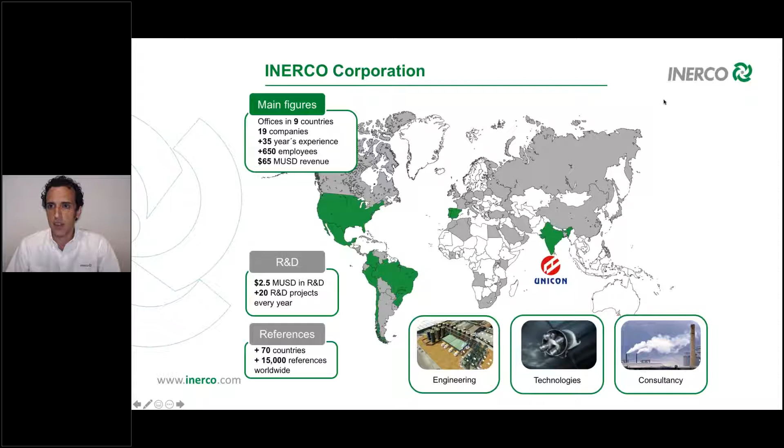First we are going to review the environmental framework in India, just a few words. Secondly, we'll go through the combustion and low NOx technologies. And then I will show you a very interesting part, the case studies, with some examples of the way to go.

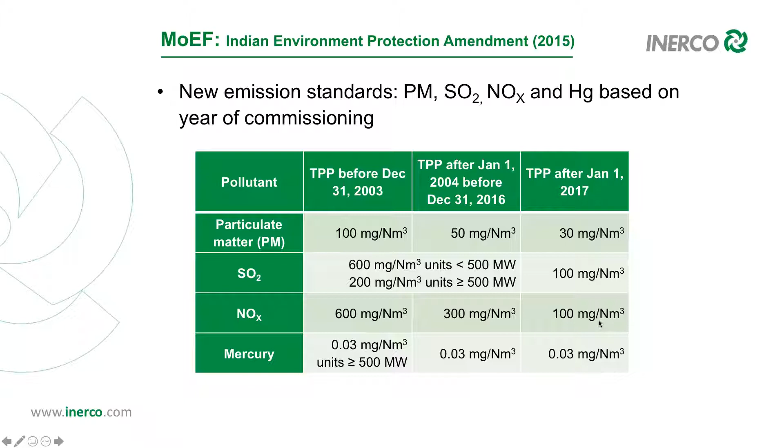So I'm going to start with the environmental framework in India. In 2015, the Ministry of Environment and Forests released new emissions standards for thermal power plants (TPP), covering particulate matter, SO2, NOx, and mercury, as you see in the table. The limit was based on the year of commissioning and the boiler size, as you see here in the differentiation. For NOx, initially the limits were 600 milligrams per normal cubic meter for units before 2004, 300 milligrams for units before 2017, and 100 milligrams for new units after 2017.

During the last year, there has been a lot of discussion about the implementation of these standards, especially the 300 milligrams limit. In May last year, it was approved to raise the limit from 300 to 450 milligrams. Since the beginning of the year, there has been a lot of push, especially from utilities, to increase the 100 limit to 450 milligrams too, arguing that the technologies for 100 milligrams are not suitable for Indian coal. We'll see what's the final decision, but in the short term, the standards are going to be somehow relaxed.

Comparing the implementation of environmental standards with other countries or regions like the US or Europe, in those regions these have been applied in different phases. Normally it takes around 10 years to implement phase 1 and phase 2, as we've seen in the US and Europe. My guess is that in the long run, all these limits will be reviewed again, and there will be more strict standards implemented. But like I said, it's going to take 10 to 15 years to see those numbers come to an end.

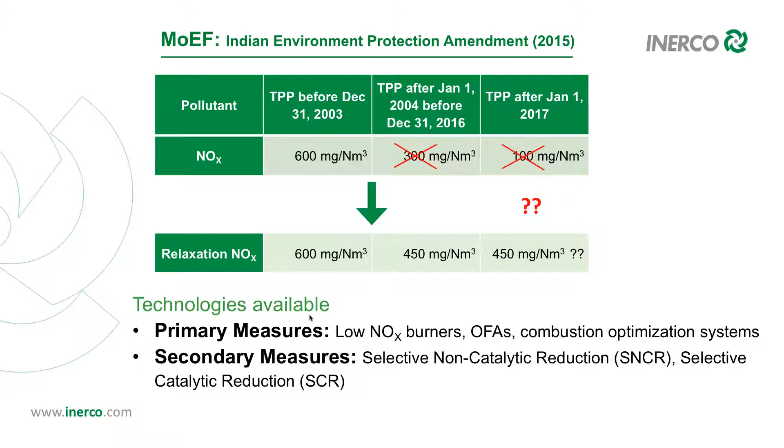In this diluted scenario, we have two groups of technologies. The first is primary measures, which involve the reduction of NOx generation. These are low NOx burners, stratification systems like OFAs, and combustion optimization systems or combustion optimizers. I'm going to avoid non-usual techniques like reburning or flue gas recirculation, to focus primarily on the most extended technologies. The second group is secondary measures, applied after combustion once the NOx has already been generated. These are SNCR, selective non-catalytic reduction, and SCR, selective catalytic reduction. So I'm going to go through the technologies now.

First, I'm going to talk about combustion modifications: LNB, low NOx burners, and OFAs, over fire airs, or SOFAs, separated over fire air. The objective of this technology is the reduction of O2 content in the first part of combustion, where the majority of NOx is generated - this is what they call substoichiometric conditions. It also tries to reduce the amount of fuel combusted at maximum temperature. There are a number of different LNB designs like recirculation, split flame, dual nozzle with swivel mechanisms, and so on. All these designs try to achieve the three objectives I just mentioned.

The definition of these solutions cannot be evaluated locally at burner level, and this is what I try to represent here. Because the modification of burners is going to change the combustion profile, and will impact boiler performance and operation. So this is an iterative process with several LNB designs tested, and then the results feed a model of the whole boiler - this is what I call overall boiler impact and assessment.

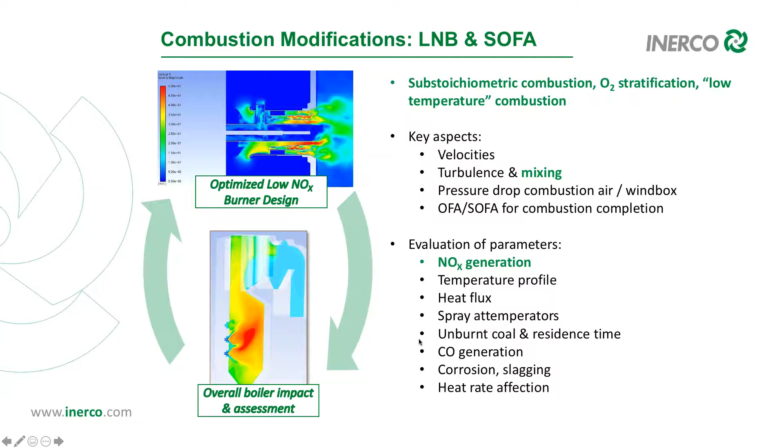Some considerations here are the manufacturing procedures and material selection to guarantee the performance, but also the durability of the equipment. You have to consider also assembly considerations, shutdown period, and commissioning. Especially in coal applications, all the mechanisms these burners have must be reliable and last in the very dusty environment they are exposed to.

Nobody wants brand new burners that cannot actuate the registers a few months after commissioning.

Anyway, low NOx burner technology allows for a reduction in the range of 30 to almost 60%, depending on how complicated the design and the furnace modification is.

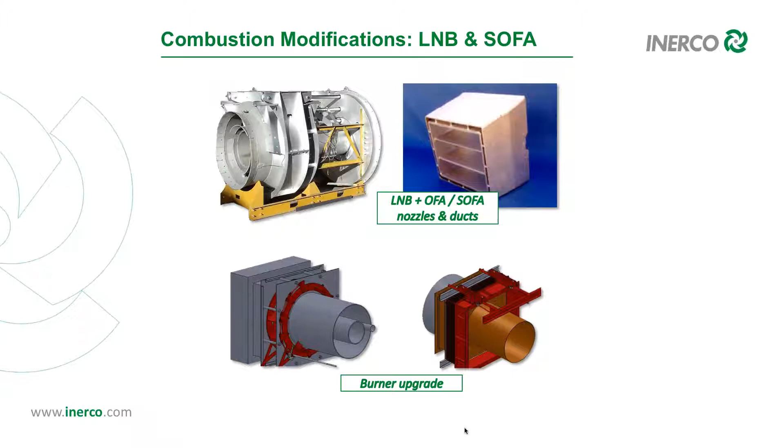So moving to the second point, there's an interesting concept about combustion modification I'd like to explain today. In conventional burner systems, there are a number of situations where the operation requirements impact negatively on the boiler performance. This is what I'm trying to show on the left.

For example, when you have one of the intermediate mills out of service, in these cases, if you want to reach full load, you need to function with the other mills. This situation results in a gap in the combustion area, and this is not good from the process point of view.

The first thing we're going to see is an increment in NOx generation because there is less stratification in the combustion. OFA nozzles get closer to the coal in this situation.

The second thing is that the furnace exit gas temperature, or FEGT, may increase importantly. This is because the combustion has moved up. More FEGT means more spray attemperation, and sometimes you have to derate the unit. So basically, we are moving the combustion up.

In this situation also, there's less residence time for the coal particle to be burned, so we can expect more LOI, more unburned carbon. This also impacts efficiency, you're going to have worse efficiency, and because you also have more CO, you're going to have probably some corrosion and slagging episodes. Not a good situation.

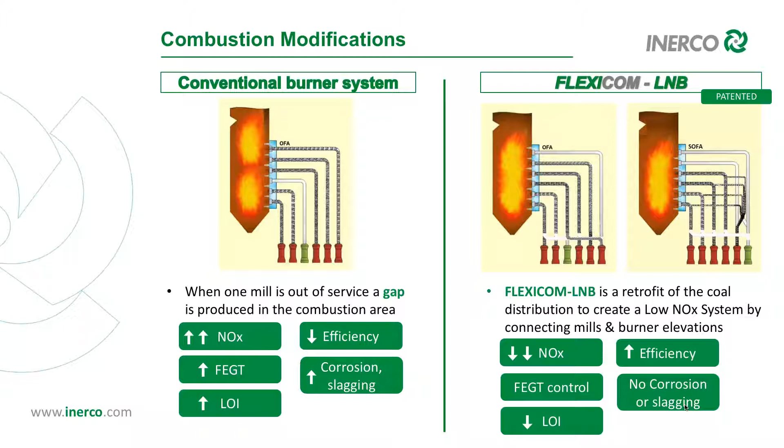One important benefit of the FLEXICOM is that it does not require the modification of the pressure parts. The connections are in the coal pipes out of the boiler, which simplifies a lot the shutdown periods. So this is a technology we developed and patented, and I'm going to show you one of the case studies that we have used in particular.

So next option or technology is combustion optimization systems and analyzers. This is also a good way to reduce NOx emissions. Historically, there has been neural networks that use a significant amount of data from the plant and provided to the operators with data and recommendations. That will be this scheme here. So you got a system collecting a lot of data and providing recommendations.

So at Inerco, we also developed our own combustion optimizer, which is what we call Abaco. Abaco uses features from the neural networks, but also implements advanced monitoring devices like what I call here Opticon, which is a flue gas composition analyzer in the boiler, or the Abaco LOI for carbon in ash analysis. So with this information and based on empirical tests we perform at the plant, we configure an expert system that is able to manage the combustion in closed loop control by acting on the air register or the coal register when it's required.

So Abaco is again a patented technology by Inerco and is also recognized as a best available technology for NOx reduction and efficiency improvement by the European IPPC directive, which stands for Integrated Pollution Prevention and Control.

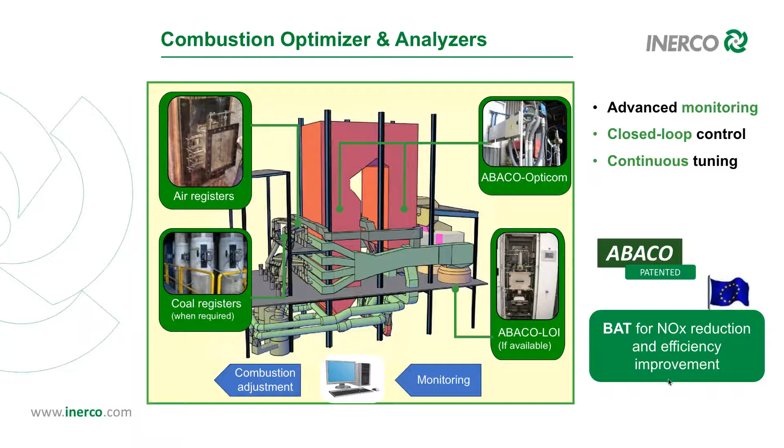So before going to the secondary measures, let me mention briefly one very useful analyzer. That's the Abaco LOI.

The Abaco LOI is an unburned carbon in fly ash monitor, although you can use it also to do the proximate analysis of the coal. By measuring the LOI, we can look to potential fuel savings and also to guarantee the sale to the cement industry. The system has been patented by Inerco and is based on the same thermogravimetric techniques that are used in the lab. That's why there is no calibration required and no affection by changes in fuel composition, operating scenarios, or interference with SO3 or ammonia.

The system is installed close to the ESPs with one analyzer and a number of these sampling modules. And you can install a number of these samplers and have a nice LOI map of your unit at different locations.

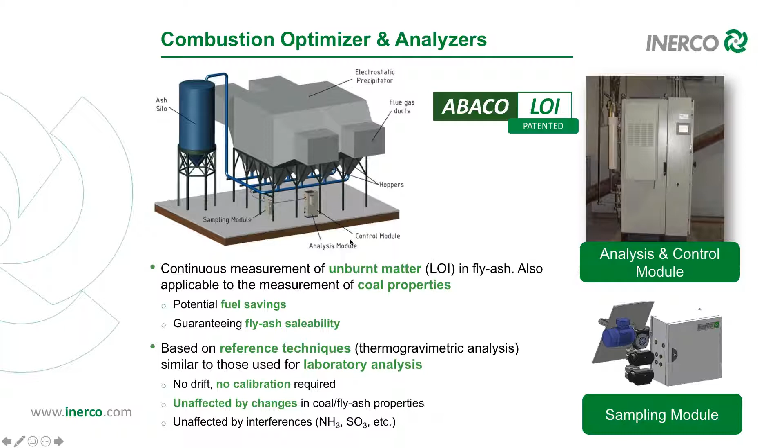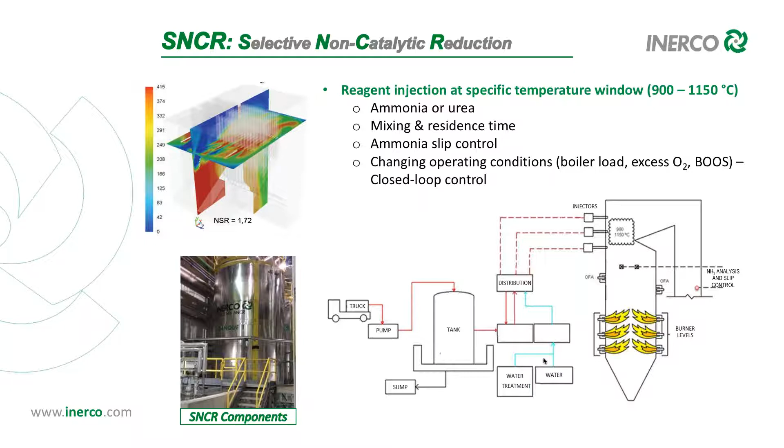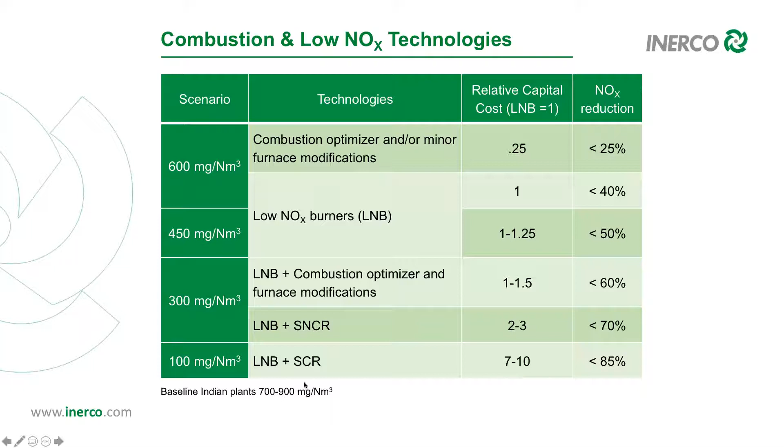The retrofits are normally complex projects, and as you can see, the relative capital cost is pretty high. However, these systems are widely implemented worldwide, and they are one option I envision more in the long term, so not in the short term, but in a few years. That's what we envision for these limits.

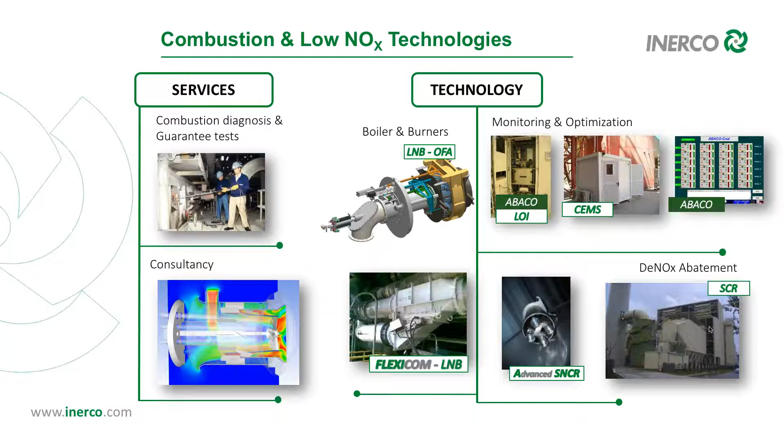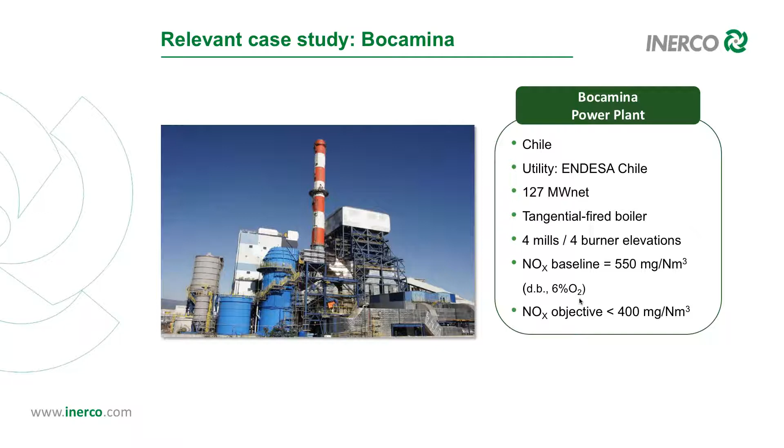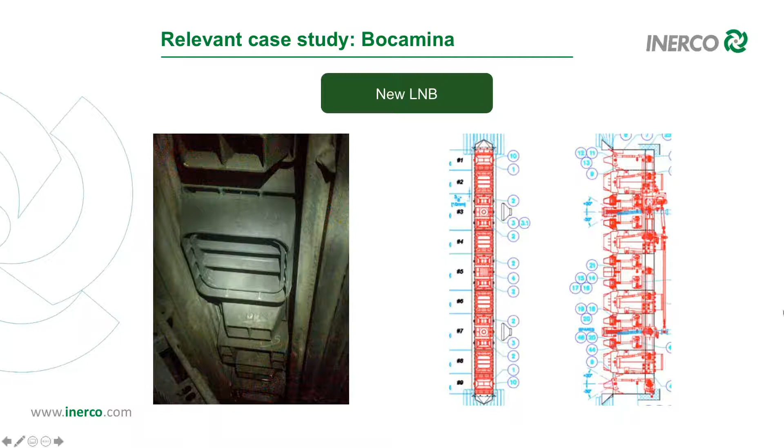We did a number of things in this power plant. The first thing we did was install new low NOx burners, new burners. Here you have a picture and drawings of the burners we installed.

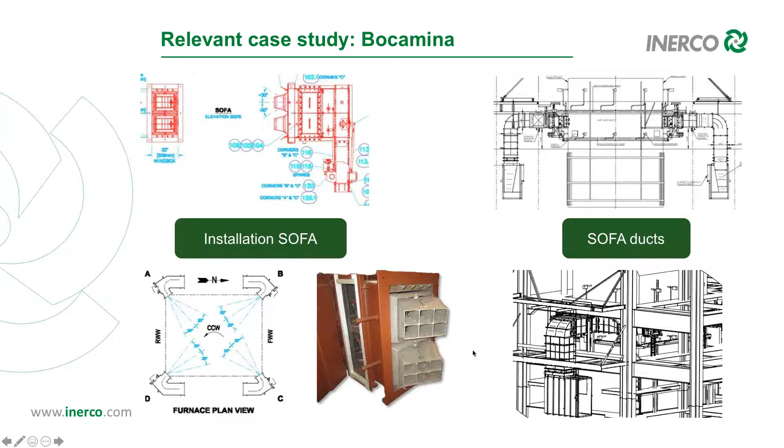We also install a SOFA, a separated overfire air system. This is an actual picture of what we installed there. This SOFA also has a yaw mechanism to adjust the angle of these nozzles, and here you see some drawings of the SOFA ducts coming from the secondary air ducts to the SOFA openings.

We also improved coal distribution, with some modifications on the coal side. We also made improvements to the air preheaters, installing a cleaning system and a double sealing system. And we had to modify the windbox because the power plant used to have issues working at minimal load, with really low pressure at the windbox, so we made modifications to work well at low load.

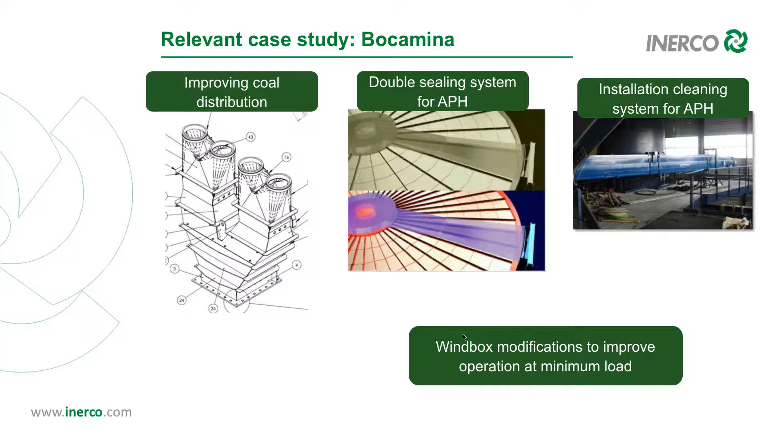The result was emissions achieved below 400, actually 390 milligrams per normal cubic meter. The good news is they are only using half of the capacity of the OFA. The OFA was designed for up to 25% capacity, and they're using 13%. CO was controlled below 100 ppm, and LOI and heat rate were maintained. So this is one good example of low NOx technologies.

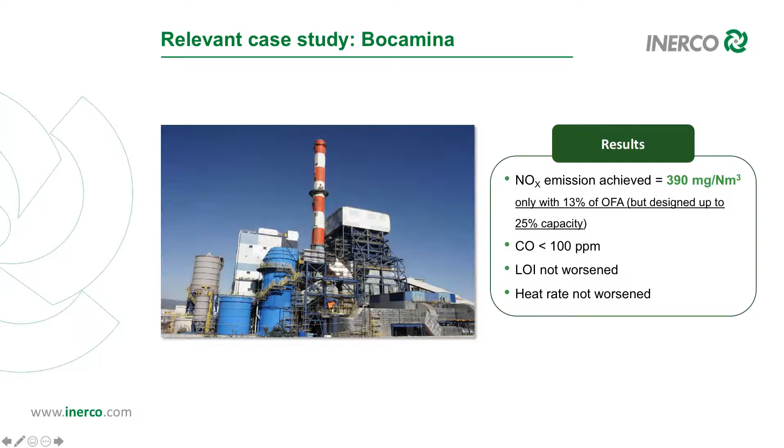The other case study is the Lada power plant, in Spain, 350 megawatts, opposed wall fired boiler with 5 mills, 5 plus 5 burner elevations. The baseline originally was 700 milligrams per normal cubic meter, and this was very challenging because the objective was to go below 200 milligrams.

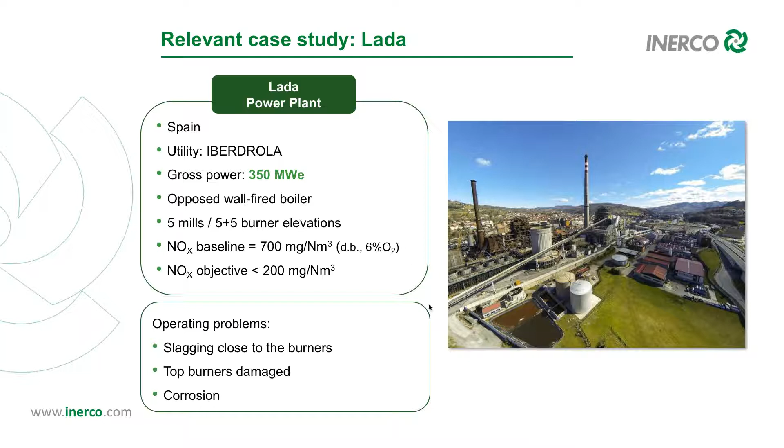Also, this plant had some operating issues like slagging in the areas close to the burners. The top burners were damaged, and there was also some corrosion in the side walls. Again, here we installed a lot of technologies.

We're going to talk about FLEXICOM too, because this is the previous situation of the boiler. The boiler has 5 mills. They need 4 mills for full load, and they can reach full load using this configuration or this other configuration. So these are the two options.

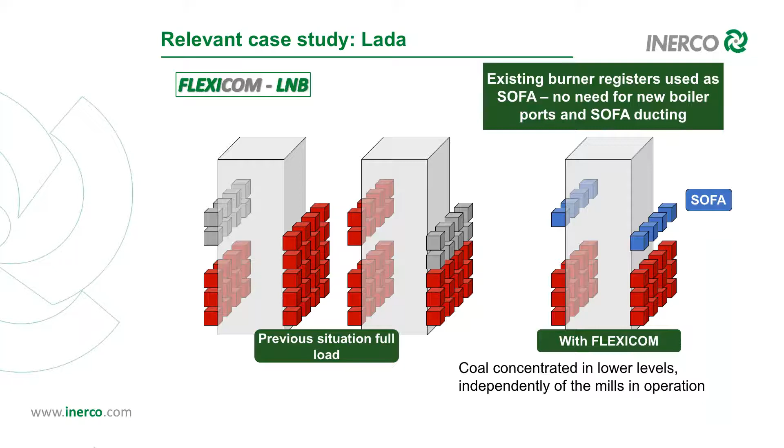So what we did, because this boiler is super short, really short, is we couldn't install an OFA or a separated overfire - there was no room to install new ports. So we applied the Flexicom concept, the Flexicom technology, and concentrated the combustion process in the lower levels here on the right, and we used the burner ports as SOFA ports, as shown here. This way we can have a SOFA without doing any new ports, and it was the only solution for this boiler because it was very short.

So again, this is an example of how we use CFD. There was a lot of design work, a lot of CFD work. We tested different burner designs - you see here different tips. We studied different geometries, materials, and local NOx generation. Having that, we did the furnace assessment, studying the overall NOx we were getting, heat transfer, velocities, carbon in ash, CO generation, and corrosion.

What I'm presenting here, on the top, is the temperatures. Because we had to decide which ports we were going to use for the OFAs, at the end of the day we went with the third option: one elevation on the frontal side, another one in the rear, for better mixing.

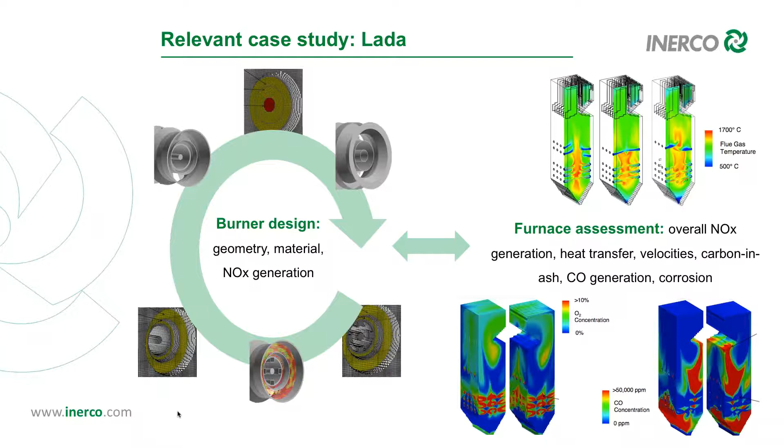Also, we studied the O2 concentration close to the walls. We need to protect the side walls because there was some corrosion in the combustion area, the bottom part, and corrosion is produced when you get nearly zero O2 with high CO in those areas. So we really needed to see what was happening there. We install, I'll show you later, what is called curtain air to protect those areas, and we also studied CO generation. So we installed the new burners.

We modified the windbox for this new burner configuration. We installed, as I just said, the curtain air - a small amount of air we inject in the side walls to avoid corrosion. We also did all the connection with the Flexicom, connecting all the mills the way I explained before, to always have the same configuration at the bottom part of the boiler.

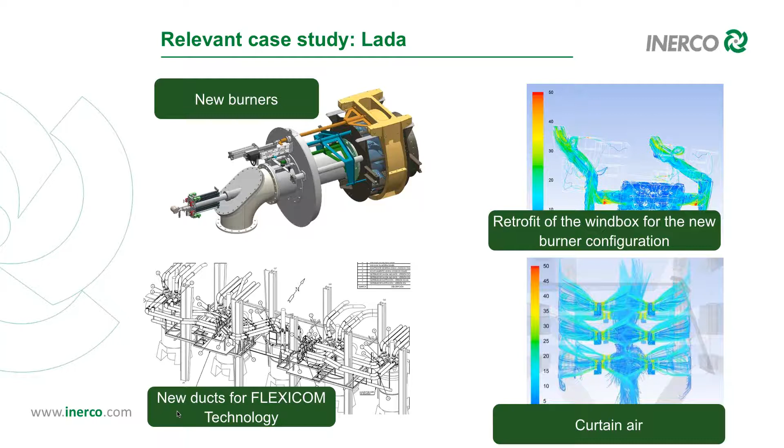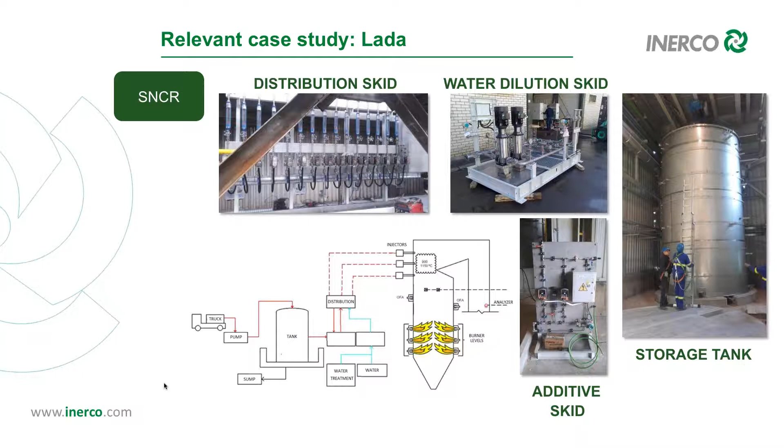And at the end of the day, what we got in Lada—remember we have a baseline of 700 milligrams—what we got in Lada was a result of 240 milligrams per normal cubic meter only with primary measures, with the combustion modifications. And using the SNCR, we were below 170 milligrams per normal cubic meter, which is a great reduction.

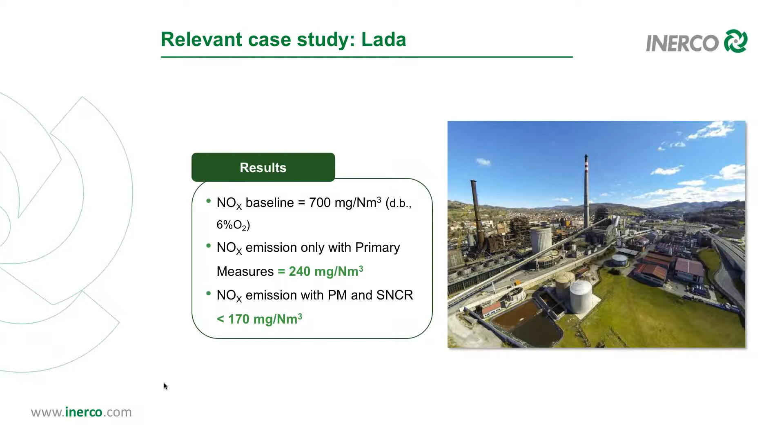So I'm gonna just mention 4 more case studies, not with all the detail. We got Los Barrios power plant. This is a tangential unit, almost 600 megawatts. The baseline was 800 milligrams, and only using the Flexicom LMB technology, we were able to go below 450 milligrams per normal cubic meter.

The other one is Battle River, in Canada, power plant, 405 megawatts. The baseline was something between 500 to 800 milligrams, depending on load. And using the Abaco, the combustion optimizer, we were able to improve the heat rate 0.5%, and also to reduce NOx between 15 to 30%, depending on the situation.

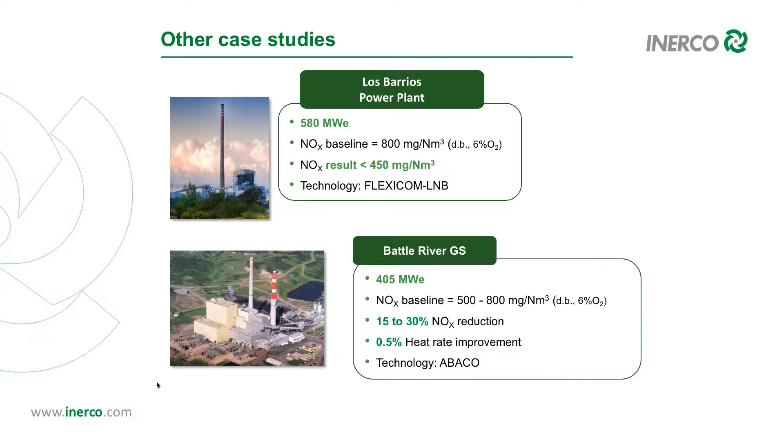And the last 2 cases is Velilla power plant. This is a 360 power plant with a very high ash coal. When I say high ash coal, it's similar to Indian coal, about 40% ash content. The baseline was really high, 2,200 milligrams when we started there. By implementing different technologies, the Flexicom, the Abaco, burner upgrade with OFA, we were able to reduce below 490 milligrams per normal cubic meter.

And the last example, we have Barranco and Granadilla. These are 4 units, small units, 80 megawatts. They used to have dual burners, coal and fuel oil, so we modified the burners to only fuel oil. Originally they had 420 milligrams. With primary measures, we were able to reach 200 milligrams, and with the SNCR, we were able to reach below 150 milligrams per normal cubic meter.

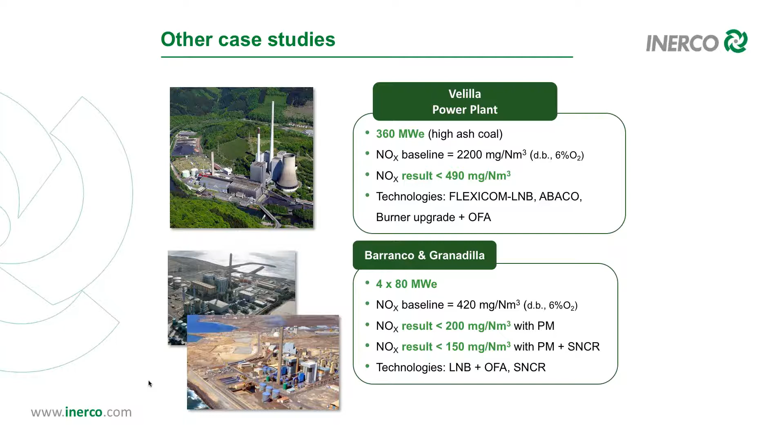Okay, so these are the case studies I wanted to show you, and also this is the end of the webinar. Thanks for your attention, and I think we have some time now for questions.